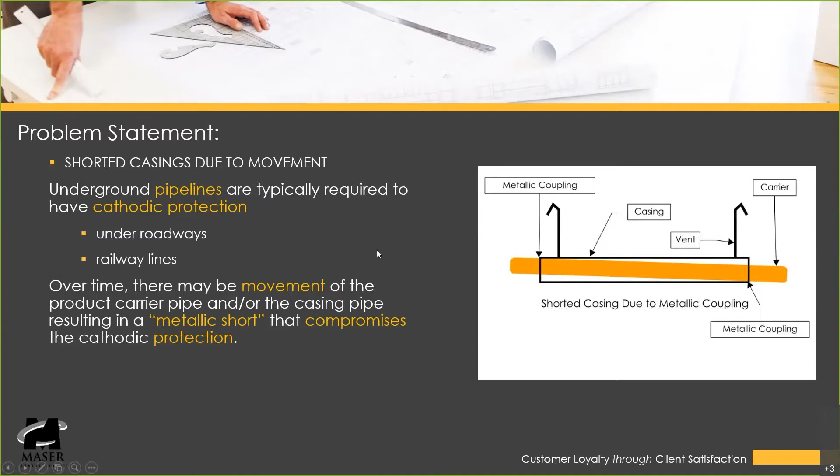Additional problems result from moisture intrusion. So our casings, because their ends might not be sealed or compromised in some way or through a broken vent pipe, may have some moisture intrusion, which then causes electrolytic coupling. Again, another short in the cathodic system that essentially bonds the carrier pipe to the casing pipe and creates an opportunity for corrosion.

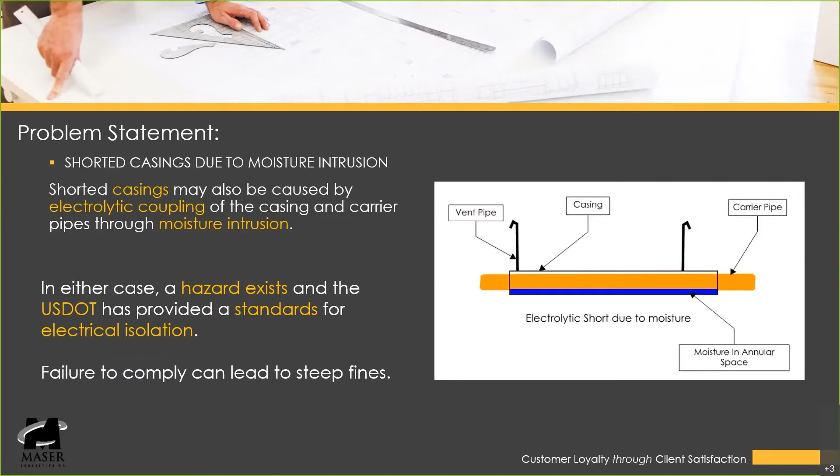And so in either case, where the casing has come into contact metallically with the carrier pipe or electrolytically due to moisture or water content in the casing pipe, you've created an issue that requires a repair. And per the US DOT standards, the statutes, CFR 49, parts 192 and 195, you have to repair this electrical isolation between the two, and the statute provides for a 6-month repair interval.

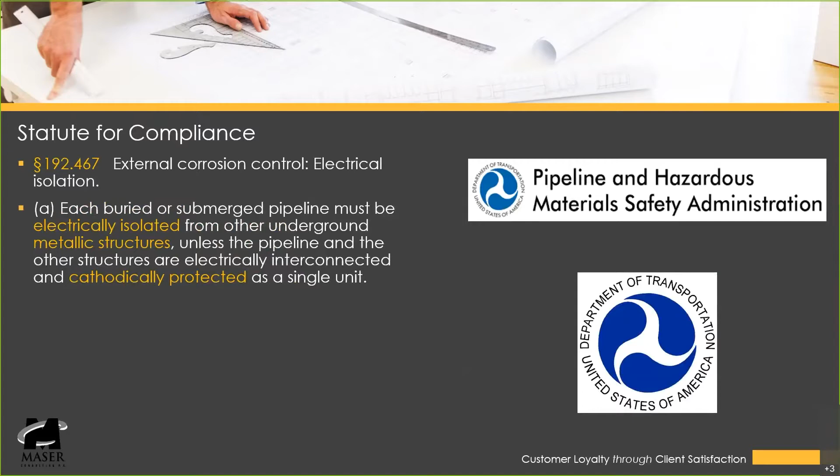So 192 identifies this issue for electrically isolating the carrier pipe from the other underground metallic structures. 195 also provides the same statute, the same limitations. And again, both require a 6-month repair window following identification.

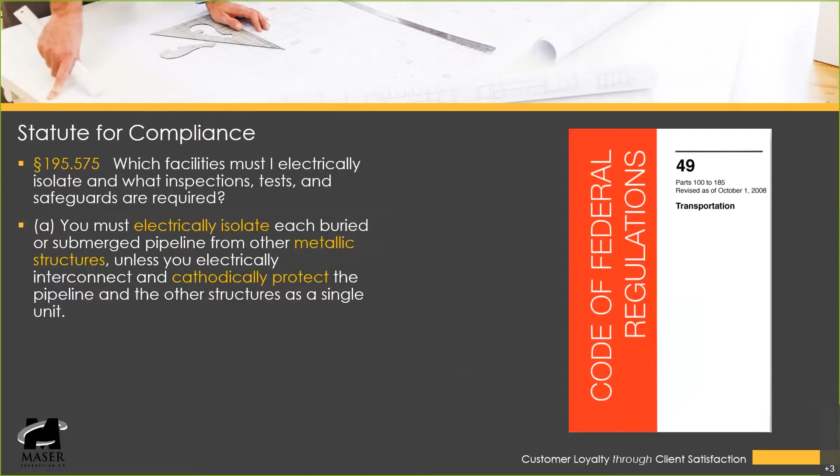So the issue then becomes where all these casings are, and many of them are unknown, not well recorded, not a lot of great records. In many cases, these things have been in the ground for anywhere from 20 to 50 or more years. There's a great deal of gas pipe that was put in the ground in the early 20th century, in the early 1900s, that is still in the ground and still operational today.

Additionally, some changes in the topography surrounding these casing areas have led to the issue where records are no longer applicable. So in many cases, we have found that the original roadway or the original railroad or structure that this casing was intended to traverse has now changed substantially. The topography has changed. There was a new roadway built, or the roadway was widened. They shifted the roadway in order to create a highway. They added an entrance ramp that wasn't anticipated. And so that topography now has changed where these casing ends are.

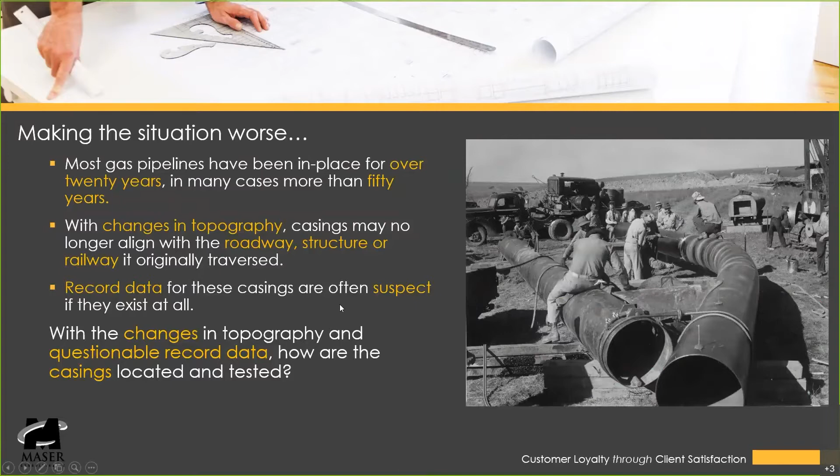However, now with the topography changes, those measurements are no longer valid. That driveway doesn't exist. The bridge pier was reconstructed and modified or changed or eliminated altogether. The curb and gutter is no longer there, and so on. And at the time, even if they were surveyed, a lot of the datum that was used was not necessarily reproducible datum. So the topography changes created additional suspects in the record data, and made everything questionable with regard to where the actual location of these facilities are. So with regard to that, how do you then find these casing ends and do the testing?

So our group has developed a process where we can pretty accurately and regularly pinpoint the location of the casing ends. So we take the practices that we're used to using, geophysical instrumentations, which includes electromagnetic instruments and ground penetrating radar, and we apply these processes and amalgamate, if you will, the information that we receive from, many times, a few different electromagnetic instruments and a ground penetrating radar system to get us to the point where we can identify where we believe the casing ends are.

So our experience in using these geophysical tools and really a lot of trial and error over the last couple of years about how to interpret the signal results gets us to the point where we have a really good idea of where the ends of these casings exist. And then, as I said, we confirm those ends by utilizing vacuum excavation.

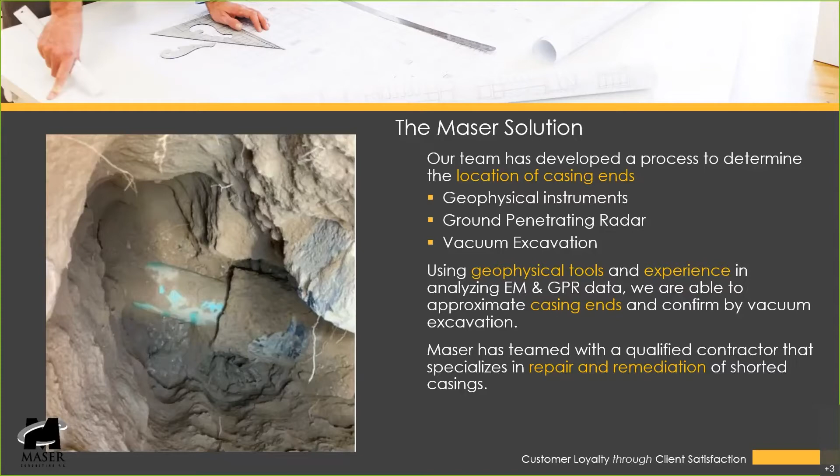So the process kind of starts out where the pipeline owner or operator typically has a really good handle on their own internal inventory. They have at least records that indicate that there's a casing in the vicinity of a particular area. They may not know exactly where the casing ends are. As a matter of fact, in many cases, they don't know where the casing ends are.

But they do have an inventory indicating that they do have casings and that those casings require testing or remediation or what have you. So they provide us with the inventory for us to go out and determine in the field what are the project needs in order for us to perform a specific investigation on that casing and identify where those casing ends are.

Typically, what we have to deal with is a pretty substantial amount of permitting. And in many cases, these permits involve the state DOT or the city or county. In some cases, it involves all three. Quite a number of cases involve railroads, which present their own particular challenges with regard to obtaining permits to work within their right of way, and they require special controls, flaggers,

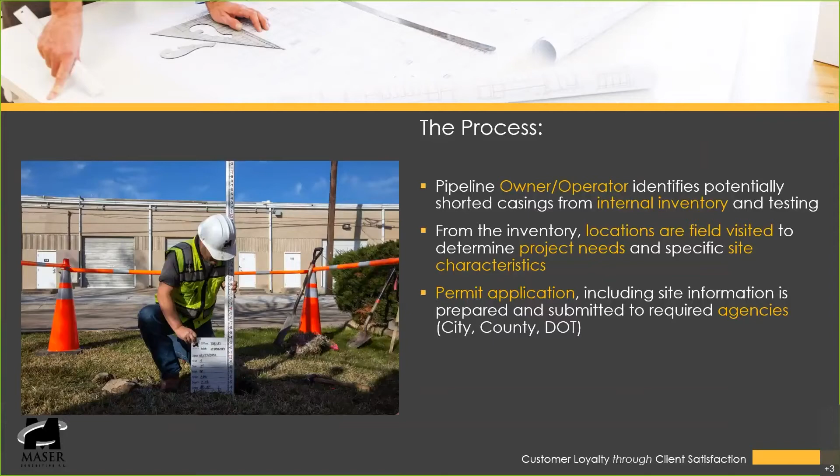and so on. So we go out and we perform a field investigation initially to identify what those needs are going to be, what the site characteristics are, and then what kind of traffic controls are going to be necessary in order for us to perform this evaluation. We put that together, submit the permit applications, provide that information to the various agencies that require it.

Once the permit is approved and issued, we go out and we apply our techniques performing the geophysical investigation. Again, as I stated, using various electromagnetic instruments and ground penetrating radar, and analyzing those results to make a very educated guess as to the location of those casing ends. Once we've done that, we identify where we believe the casing ends are, and then we bring in our vacuum excavation equipment and we dig on those locations to confirm and pinpoint where those casing ends are.

Once those casing ends are identified and exposed, we then map those casing ends with survey grade equipment, and we use reproducible coordinate values, so NAD 83 state plane coordinates, so that from now on, anybody should be able to, with the survey instruments or the survey information, go out and identify the actual location of that casing end. Once we do that, we backfill that casing end, we compact it to specifications, and we typically include a marker ball that also further helps identify exactly where that casing end was identified to exist.

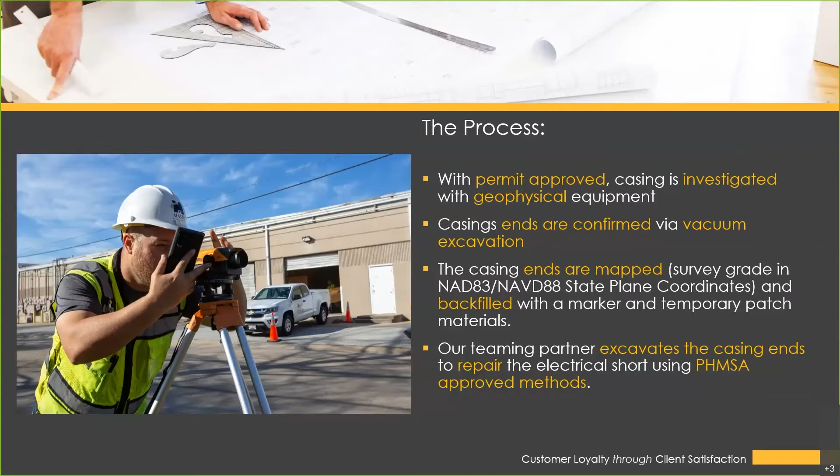So once they do that and repair it, in accordance with the approved methods and provide a report on that information, then they backfill the location with a permanent patch, which is generally speaking much more extensive than the small core patches that we install. Our teaming partner also does things like install new vent pipes or repair vent pipes that were leaking prior.

They'll install a new test station, and they'll do everything they can to make sure that that is outside of any particular traffic area. So in some cases, that might mean extending a vent pipe beyond a roadway area, certainly extending test stations to an area that's accessible outside of the right of way. And then, like I said, they do pretty extensive backfill and compaction and permanent patch materials.

One thing that I do want to point out is that this process started because there was a problem in that there were shorted casings, and the problem was exacerbated by the idea that these casing ends were not easy to locate. They were not easy to pinpoint because, again, record information was spotty or suspect or non-existent, and there was not a consistent use of a specific survey datum in any way to identify where these casing ends were so that it was repeatable.

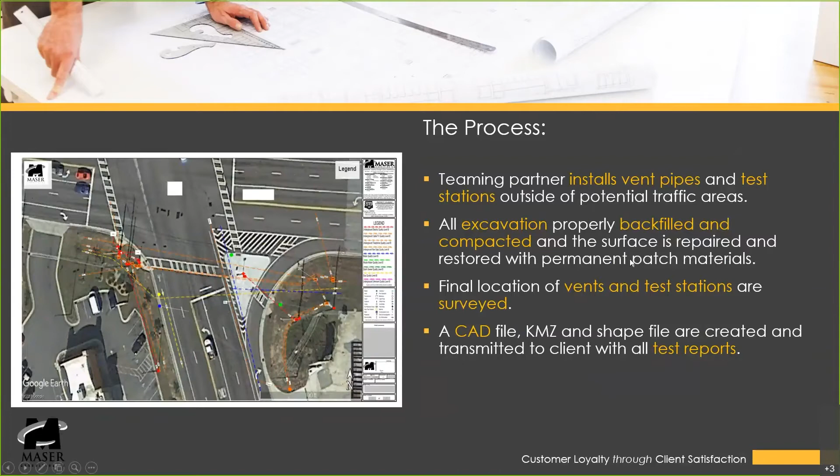Not only that, we then survey the ends of the casings. We survey the vents and newly installed test stations and whatever repair work that was necessary. And then from that, we create a myriad of deliverables for our clients. And those go anywhere from a CAD file through KML and KMZ files for Google Earth, or shape files for incorporation into their internal GIS system. And then we package that all together, the survey information, CAD files, and so on, along with the test reports, and we forward that back to our client.

So with all that, the benefits that come from this are lower cost. So the impact in cost and the impact in time is substantially reduced. The amount of restoration is reduced. Pardon me. And then the client ends up with a lot better information with regard to where the casings exist. So Trey, I'm going to ask you to pipe in on a couple of these things. Trey Hayes is with me, and I'd like Trey to go ahead and step in and identify a couple of issues that he's had to deal with regard to these casings.

Yes, sir. Thank you. You covered it well, Greg. But like you said, we definitely have taken our time, and in the field, we've developed a process that we've been very successful with. We've been able to find the casings a ton of times, and we were really impressed with how many times we've been able to find it utilizing the method that we've come up with.

We've had all types of things. We've had to go somewhere like a mile off of the beaten path that they wanted us to do. We had to get mules and utilivacs and get all the way off in there and get down and dirty with them. But we pretty much have done whatever we need to do to make sure that we came up with the solution that the client was looking for. Greg covered it well.

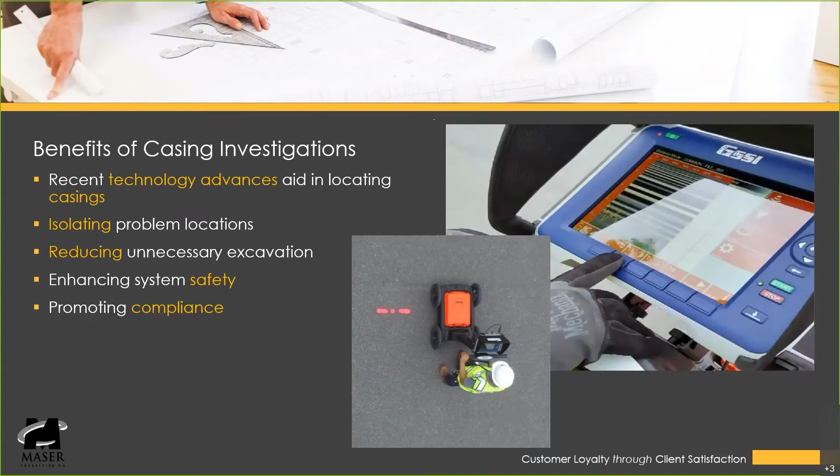We end up providing an enhancement to their system safety and their compliance issues. And then we provide them with reproducible results at the end of this that have a survey deliverable that they can go out and reproduce those coordinates and identify exactly where those casing ends were determined to be.